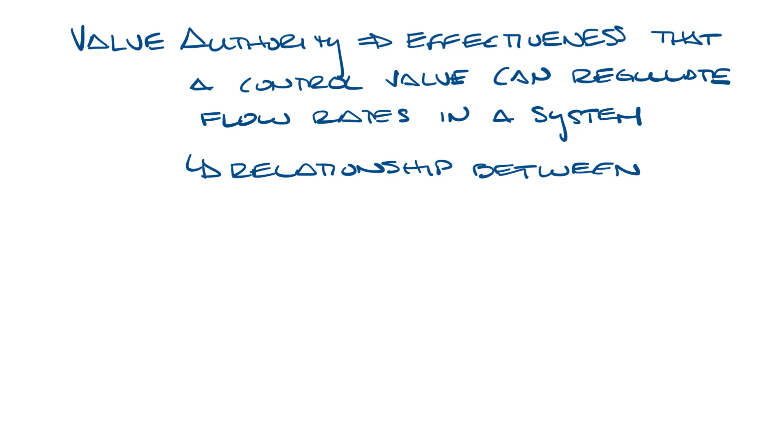Valve authority is a term used to describe the effectiveness with which a control valve can regulate flow rates within a system. It's determined by the relationship between the pressure drop across the valve when fully open and the total pressure drop in the system. Essentially, the higher the pressure drop across the valve compared to the rest of the system, the more control, or authority, the valve has over the flow rates.

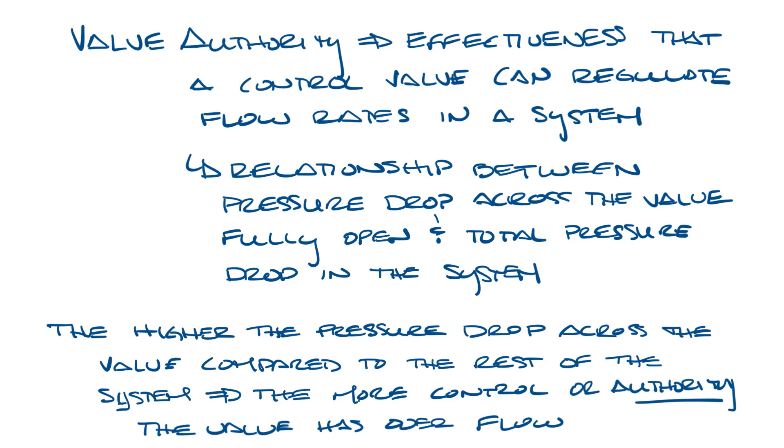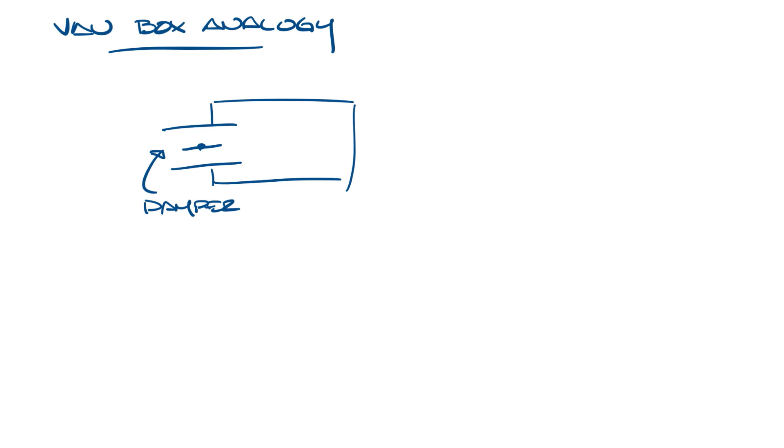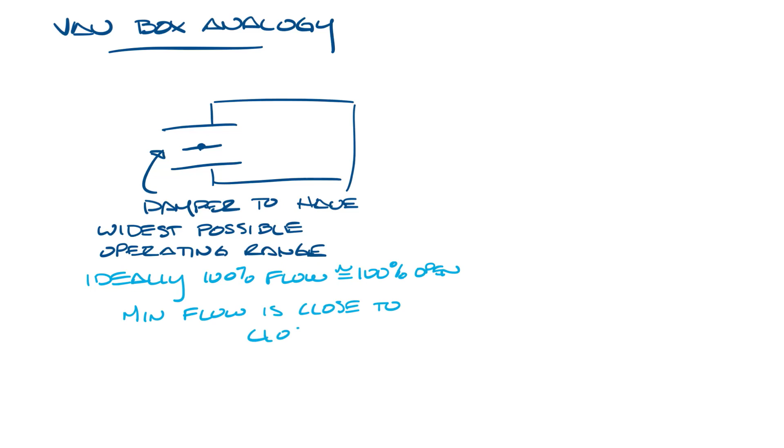Let's move this over. So I'm a long-time air distribution person, so an analogy I found helpful is the concept of operating VAV boxes. When selecting a VAV box, the goal is to ensure that the damper has the widest possible operating range to maintain efficient airflow control. Ideally, you want the damper to be nearly full open at maximum flow and close to full closed at minimum flow. This wide range allows for precise adjustments to meet varying conditions.

This would be considered having high valve authority. It means the damper has a significant control over the airflow, enabling it to respond effectively to changes in demand. If you select an oversized VAV box, you can have a situation where at maximum flow, the damper only needs to be open about 30% and barely changes as demand decreases.

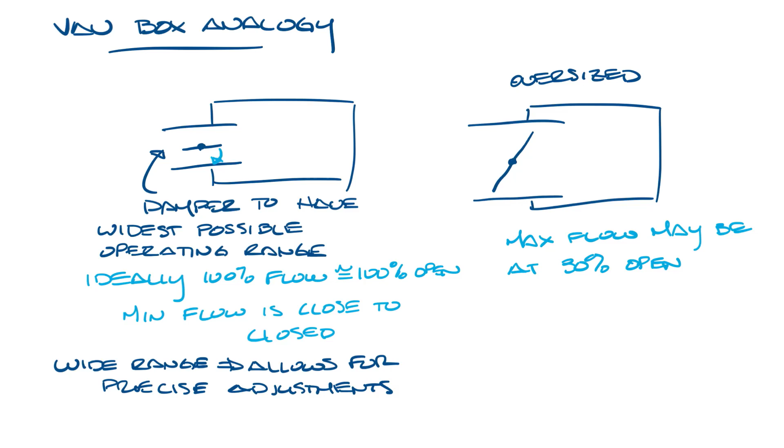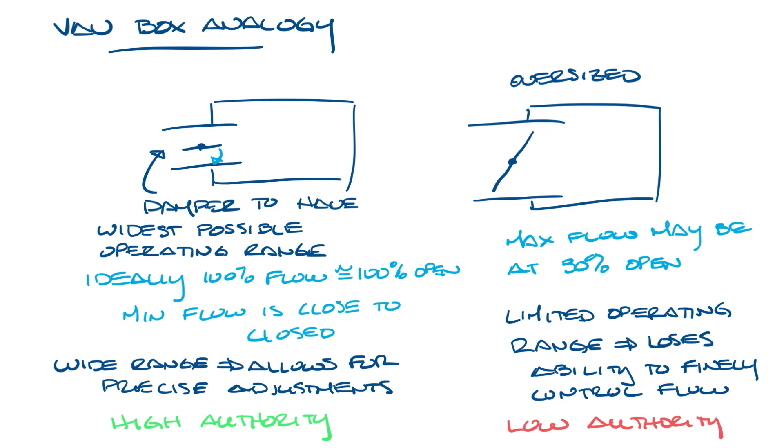This limited range of operation means that the system loses a lot of its ability to finely control airflow, essentially having low valve authority. The damper's influence on airflow is minimal. And so this one would have high valve authority. Okay, so let's move this over and go back to hydronics.

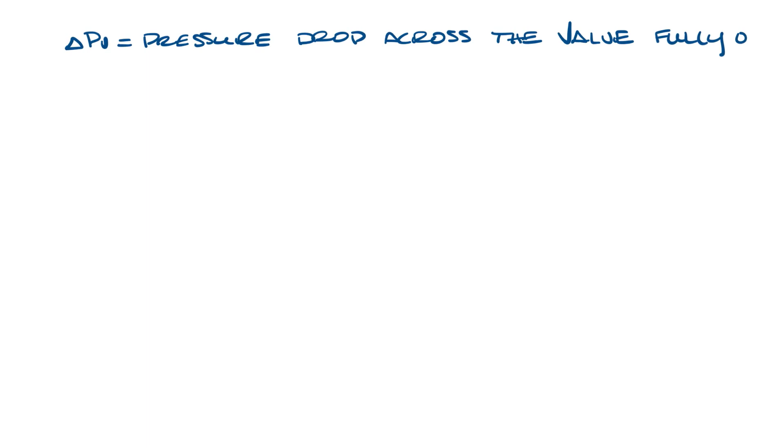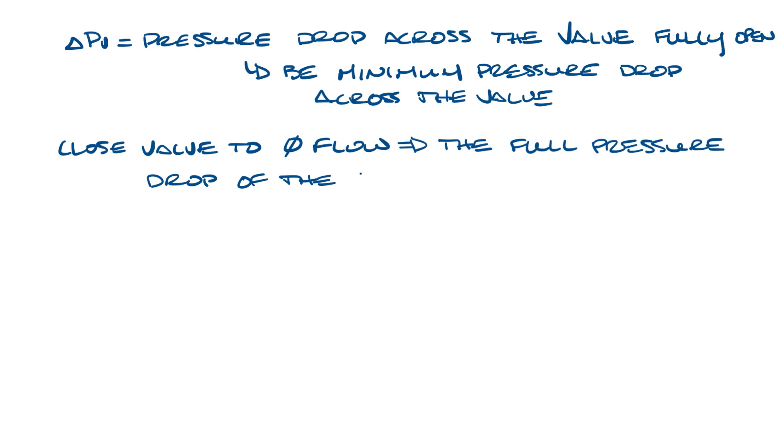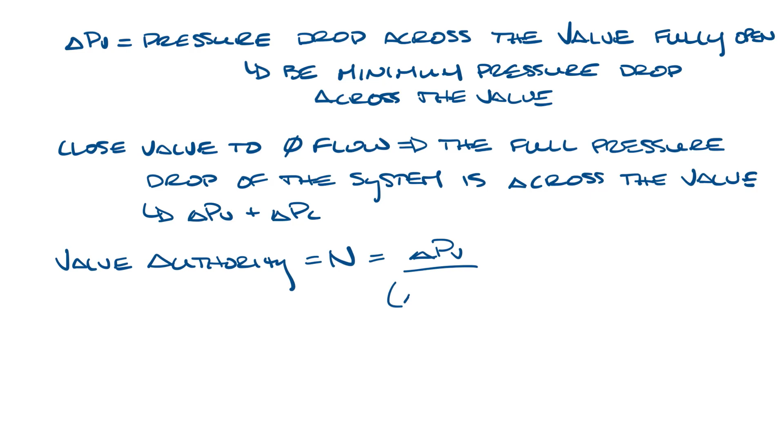To calculate the authority, you want to look at delta PV, which is the pressure drop across the valve at its fully open position, since this would be the minimum pressure drop across the valve. If you close the valve to zero flow, the full pressure drop of the system is basically across the valve. This is defined as delta PV plus delta PC. The valve authority, N, is equal to delta PV divided by delta PV plus delta PC.

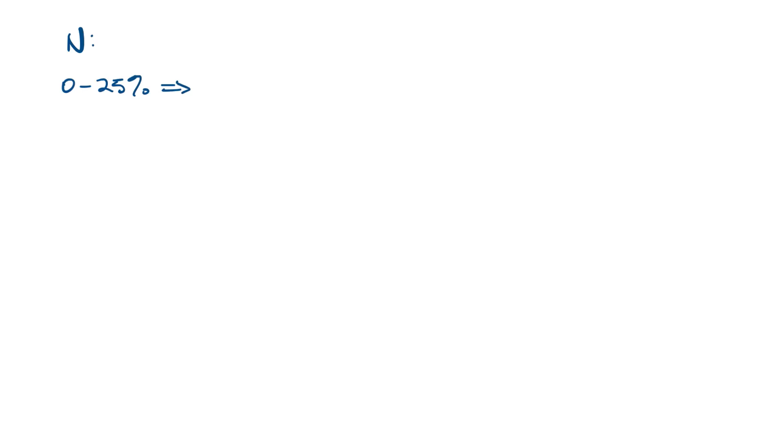Let's scoot this over one more time. So let's look at different ranges of N. So if N is between 0 and 25%, the valve authority provides unstable to fair control with a low pressure drop. Between 25 and 50%, the valve authority provides good control and a reasonable pressure drop.

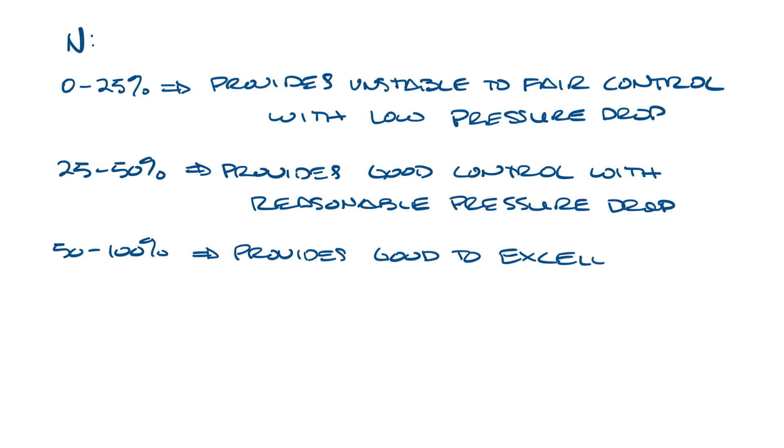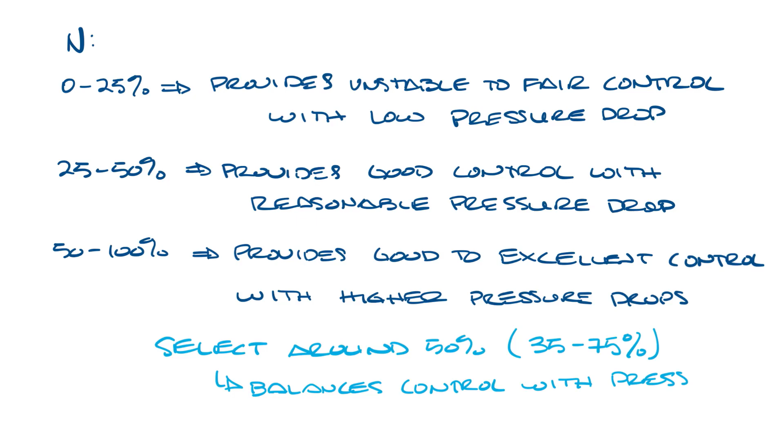And between 50 and 100%, the valve authority provides good to excellent control, but has a high pressure drop. So selecting around 50%, maybe between 35 and 75%, is a good range because it balances control with pressure drop. So let's bring all this back on screen. So that answers the question, what is valve authority?